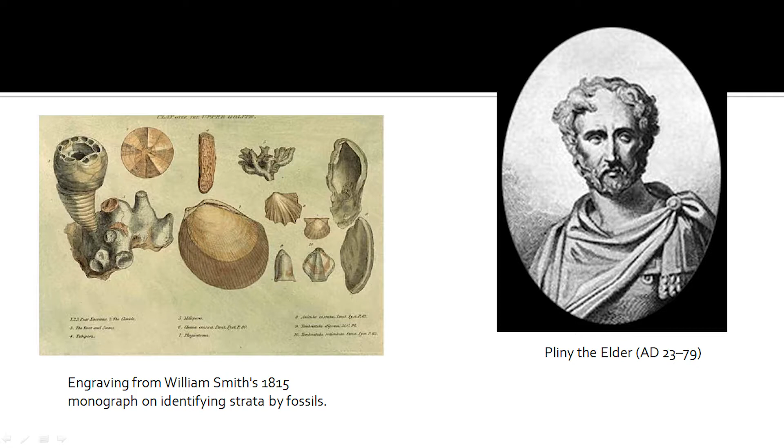Geology is a very old subject. We humans have used geological knowledge and geological material for our sustenance and survival. During the Iron Age, we were mining iron ore. During the Chalcolithic Age, we were mining copper. Throughout human history, we have retrieved material from Mother Earth. We have used geological knowledge of building stone and excavation. Ancient Greeks, mainly Aristotle, Theophrastus, Pliny the Elder, wrote scriptures about geological time, geological processes and geological material.

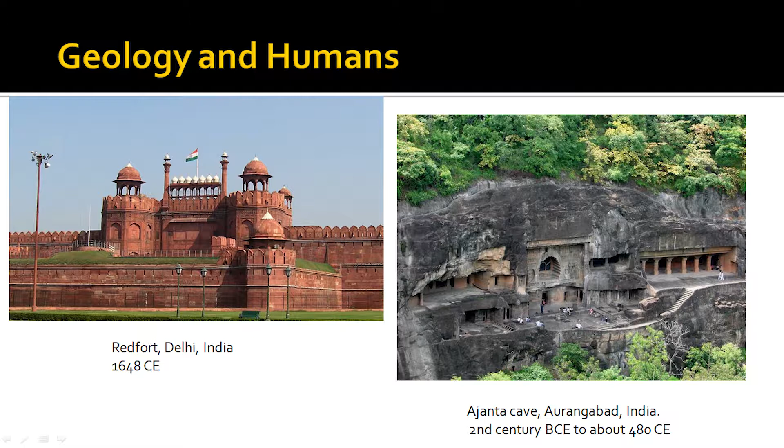So it won't be an overstatement if I say geology, or the use of geology, or the existence or prominence of geology, is as old as human history, human time. If not even Homo sapiens, I think even probably Neanderthals were using geological knowledge. Flint was being used to create tools during the Stone Age.

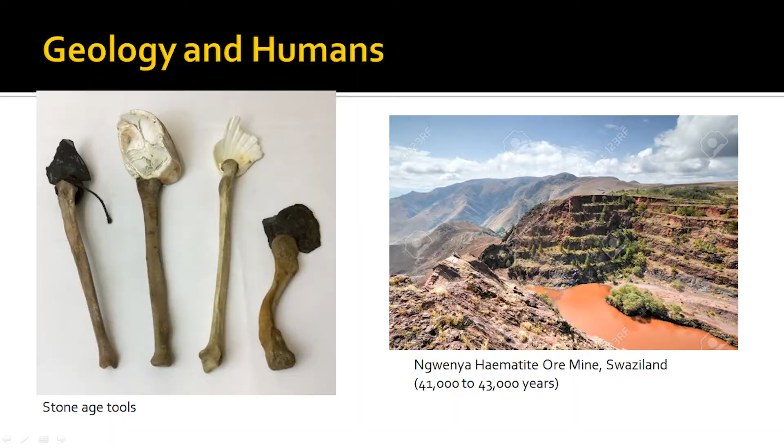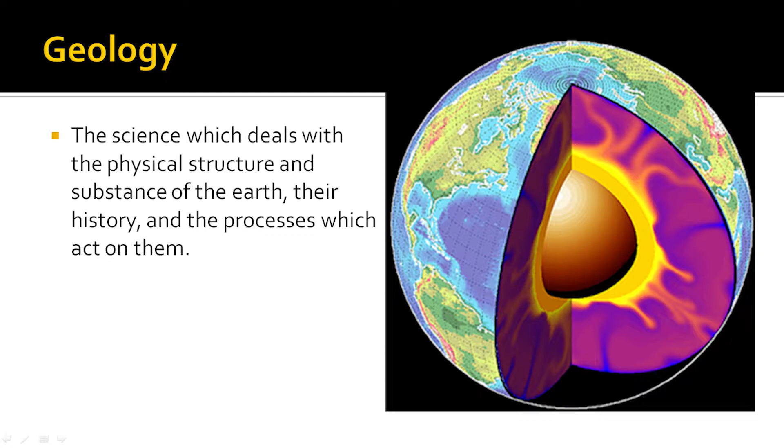So geology is old. And what is geology? Geology is the study related to Earth's interior, Earth's surface, structures present in Earth, the composition of Earth, and the various dynamic processes which are taking place on the surface and inside the Earth.

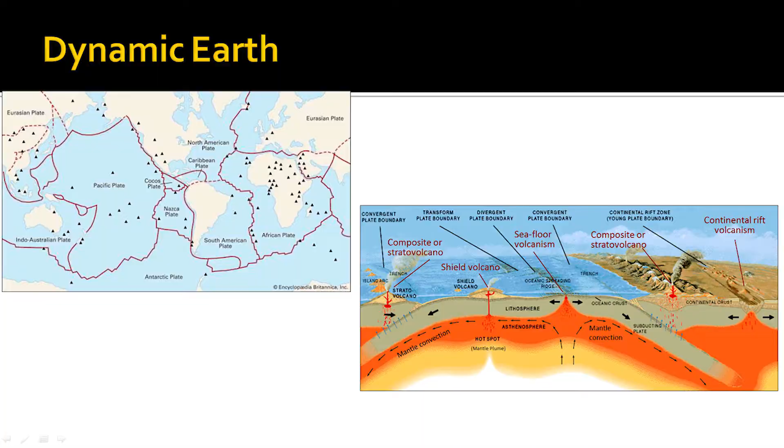Now, we know that geology is quite old, geology is ancient. However, there is a branch of geology which is relatively new. We call it engineering geology. Now, what is engineering geology? Engineering geology is the engineering application of geological knowledge.

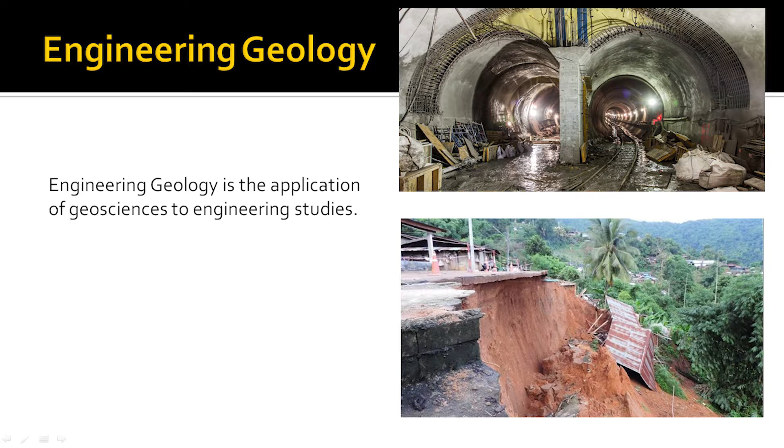So if you are constructing a dam or constructing a tunnel, all these constructions either take place on the Earth's surface or inside the Earth's surface. And they have to have geological inputs, be it the amount of stresses surrounding the construction or the parent material in which the construction will take place. So geology and the use of geological knowledge for civil construction is engineering geology. Again, this is a very new field, let's say 100, 150 years old. Prior to this, limited geological inputs were incorporated while designing a tunnel or a dam.

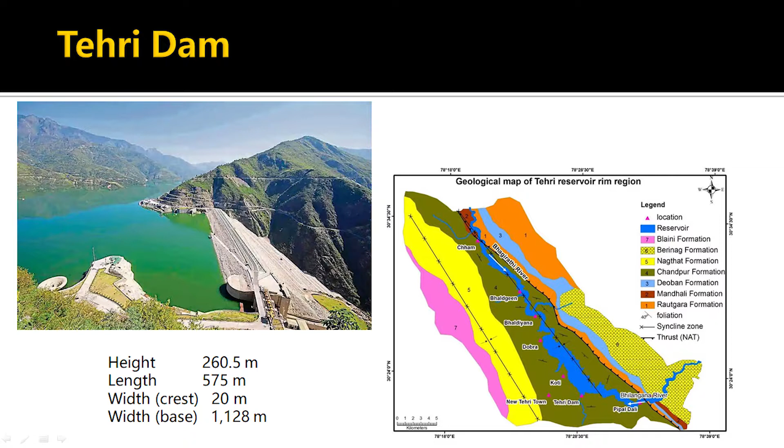However, things changed. During the early 20th century, while underground excavation was taking place in the Alps, there were instances of rock bursts and tunnel squeezing. Then the mining engineers and geologists realized that there's more to it than just the composition of the rock material. There are stresses, there are different stress environments which affect the rock mass.

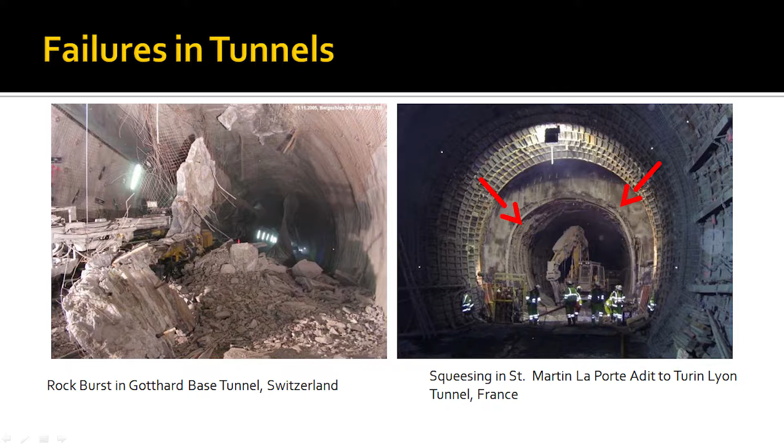Historically, it has been assumed that if it is rock, then construction would be much easier, because rock is always stronger than soil mass. Technically, if a consolidated material has a strength beyond 1 megapascal compressive strength, then it's classified as rock. So historically, it was always thought that construction in rock is easy, but things changed.

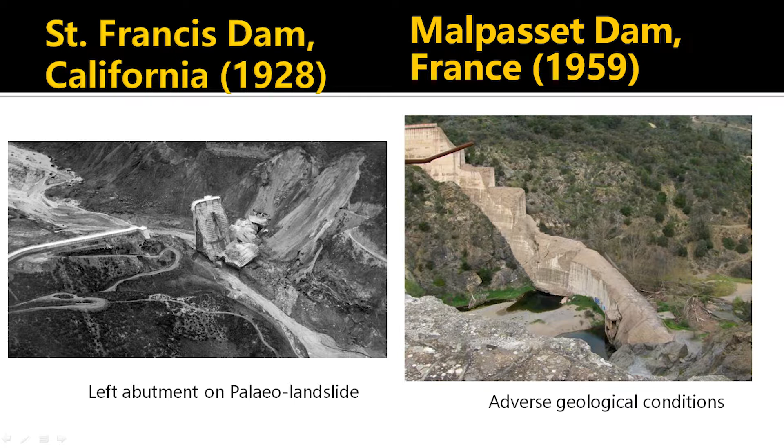The underground excavation in the Alps made tunnel engineers realize that there can be issues related to stress environment during excavation. Then another major thing happened in 1928, the collapse of St. Francis Dam in California. The dam was designed by Mulholland, who was a self-trained engineer.

Limited geological knowledge was available, and people were actually not keen or were less inclined towards employing geological knowledge. If it appeared like a rock, then it was thought that this will have greater strength. So the left abutment of St. Francis Dam was founded on a paleo landslide, and soon it collapsed, leading to the death of more than 400 people.

Then again in 1959 in France, the Malpasset Dam, a concrete arch dam, collapsed. The reason behind the collapse was the designers not employing the geological setup or the consequences of the prevalent geological setup. The gneissic strata, whose foliations were dipping downstream, combined with the heavy load resulting from impoundment of water, led to failure of the dam.

These instances made civil engineers and geotechnical engineers realize that we need to employ geological input, be it the mineral composition or the discontinuity orientation, while designing our dams, tunnels, roadways and highways.

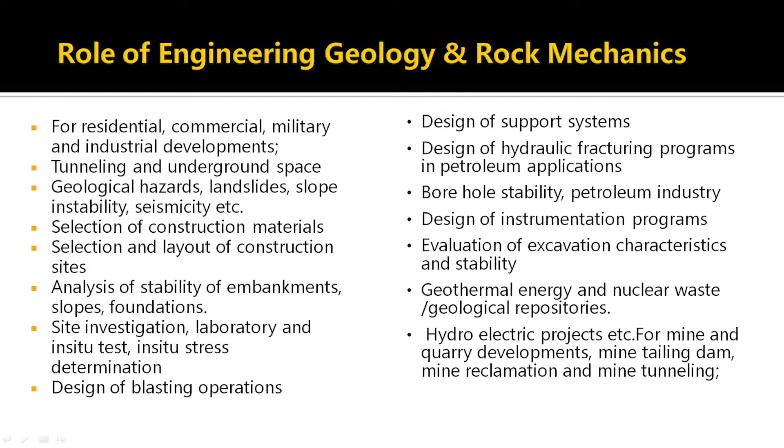Now, you can either be an engineering geologist or a geotechnical engineer. Geotechnical engineers and engineering geologists work along the same lines. The difference arises from the fact that an engineering geologist does engineering using a geological base. On the contrary, a civil engineer, a geotechnical engineer, does geology using a civil engineering base.

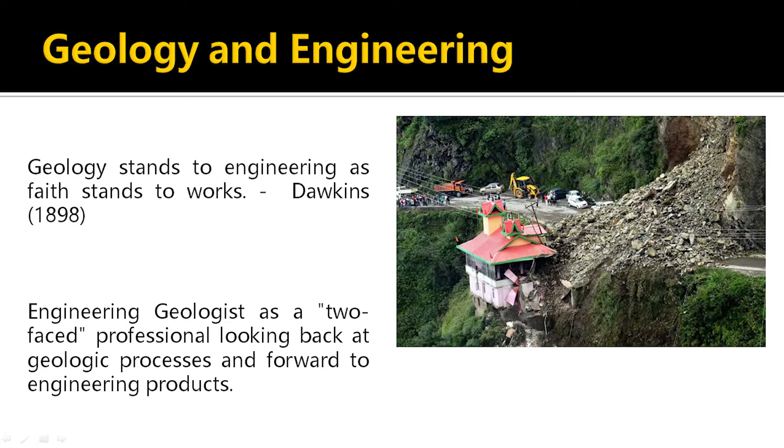Now, what we actually deal with, or what we want from this geological or geotechnical knowledge, is to know: if I construct a building, a dam or a tunnel in a certain rock mass, will it remain stable? What would it require to remain stable? What are the challenges I'll face while undertaking excavation?

Now, what I want from my ground is for it to give me easy excavation while I'm excavating, but after the completion of the excavation, after the completion of the structure, I want my rock mass, my ground, to remain stable.

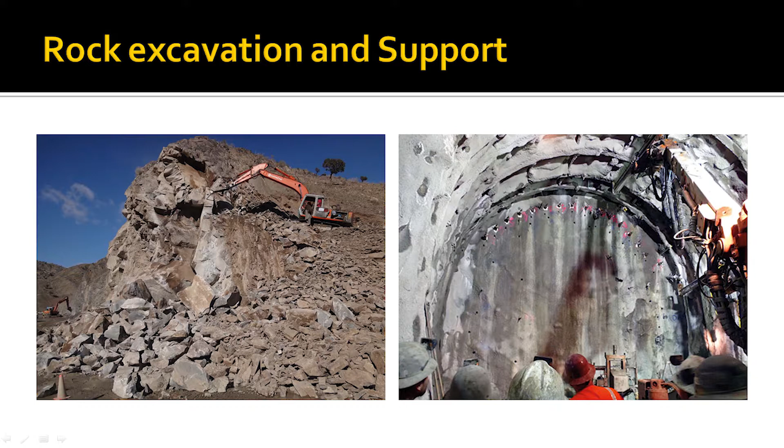My requirements from the ground are twofold. I want it to be weak when I'm excavating, and I want it to be self-supportive, or stable after the work has been completed.

All these factors come down to the strength assessment. What is the mineralogical makeup of my material? In engineering geology, we mostly deal with rock mass and rock material. Rocks are an aggregate of minerals. They have certain strengths, certain composition. They may be prone to easy weathering, or they may hinder or delay weathering depending upon their composition.

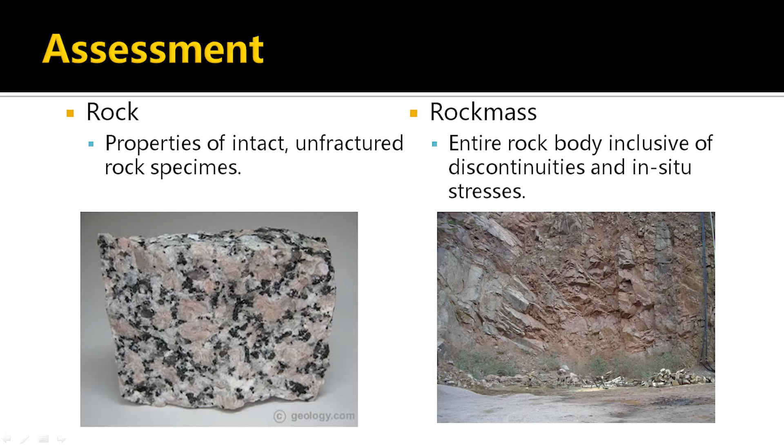But they are intact in nature. Rock material, the way I have used it till now, is intact rock mass. What engineering geologists have to study is rock mass, which is intact rock material, an aggregate of minerals, plus discontinuities. Discontinuities are joints, fractures, shear planes, faults, together with in situ stresses. So a rock mass would be your intact rock, your discontinuity planes, and your in situ stresses.

The combination of these three components compiles what you call a rock mass. So rock mass can be weak, highly deformable, or strong. We decide these three factors, its deformability and strength, based on tests done both in situ and inside the laboratory.

Another thing that requires consideration is scale effect. If my area of interest, my excavation domain or parameter, is quite small, then I only need to be concerned about the intact rock properties, the properties of the aggregate of minerals, the composite of different minerals. But if I increase my scale, then the properties of discontinuities, the joint system, are included, and they are crucial to decide the whole rock mass properties.

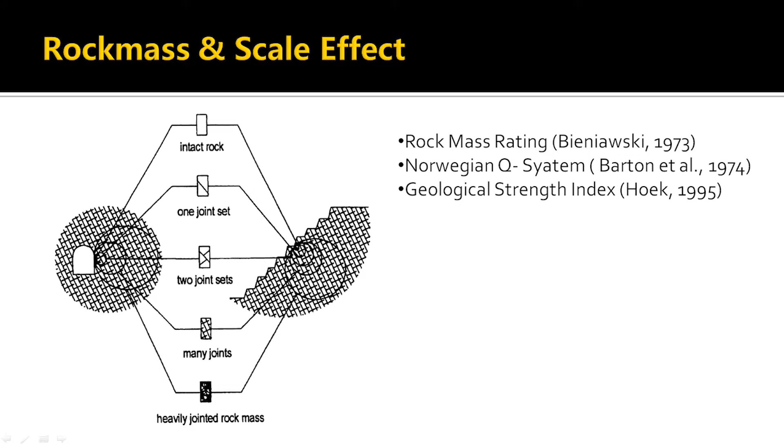There have been other well-defined classification schemes: given by Bieniawski, which is Rock Mass Rating; given by Barton, which is the Q system; and one given by Hoek, GSI, Geological Strength Index. We will cover these topics in another lecture, but for now we'll primarily focus on intact rock properties.

The assessment of both rock and rock mass properties is crucial for design of any excavation and construction. Before we go to the strength assessment, we first need to comprehend the difference between pressure and stress. So what is pressure, what is stress, and how is pressure different from stress?

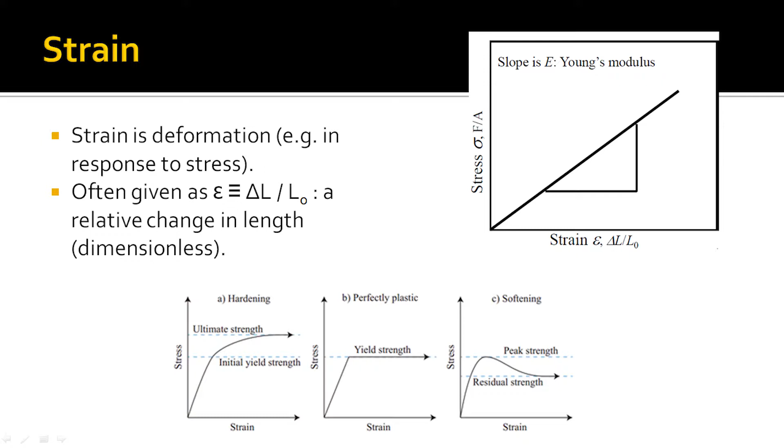Pressure is force per unit area. Similarly, stress is also force per unit area. But there is a fundamental difference between pressure and stress. Pressure is an external entity, while stress is internal. There is generation of stresses due to externally applied pressure. Once you exert some external pressure, some external load on a rock material, there is a restoring environment generated inside the rock material, which is called stress.

Again, pressure is scalar. On the contrary, stress is a second order tensor. It has 9 different components. For pressure, you will have similar values in all directions from a point, which may or may not be true for stress. Another important thing is pressure is always acting perpendicular to a surface and is always compressive. On the contrary, stress can be compressive, tensile, or shear.

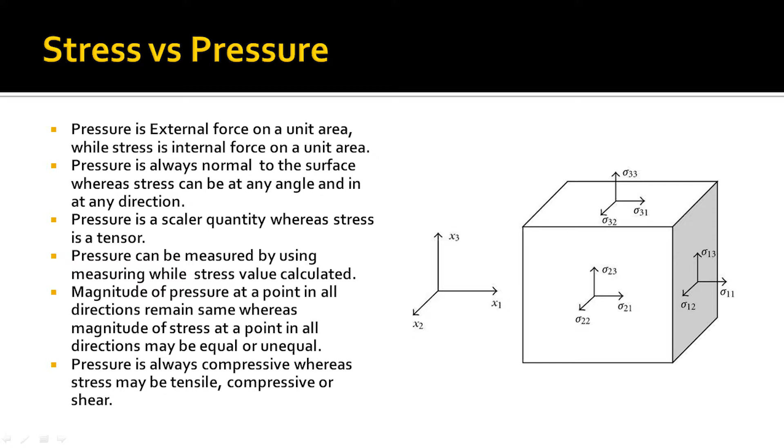Based on Cauchy's theorem, stress in a body at any point can be resolved into 3 mutually perpendicular stresses named sigma 1, sigma 2, sigma 3. Sigma 1 being the maximum, sigma 3 being the minimum. These axes are mutually perpendicular to each other, and the combination of these stresses generates normal and shear stress inside any plane in an element, in an object.

Pressure leads to stress. This is external, while this is internal. Suppose there is a block of rock, and I apply some force, some load. Then there will be certain restoring forces generated inside this body. Now this is stress here. You are applying force here. This force is generating a certain amount of stress. So stress is internal. Now how come it's different from pressure?

Numerically, both are force divided by area. In rock engineering geology, it's megapascal, Pascal being Newton per meter squared. So numerically, they are both equal, but there is a fundamental difference between pressure and stress.

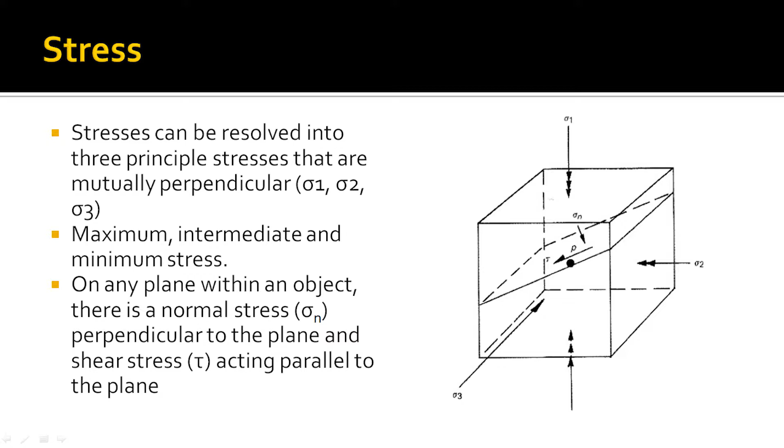So for each plane you will have one normal component and two shear components. If this is your y axis, this is your z axis, and this is your x axis, and you have a cubic element here, then on this plane you'll have a normal stress component denoted by sigma y and two shear components. One would be directed towards x, denoted tau yx, and another one tau yz. This is true for all the components.

So this is the difference between stress and pressure. Again, you have one maximum principal stress, one minimum, and one intermediate. These are the stresses which are acting on planes which have zero shear stress.

They can be tensile, compressive, or shear in nature. This stress leads to strain, which is deformation. Whenever there is stress acting in a rock material, there is development of strain, usually denoted in percentage as the ratio of change in either length or volume divided by original length or volume. So your strain can be axial, diametral, or volumetric strain.

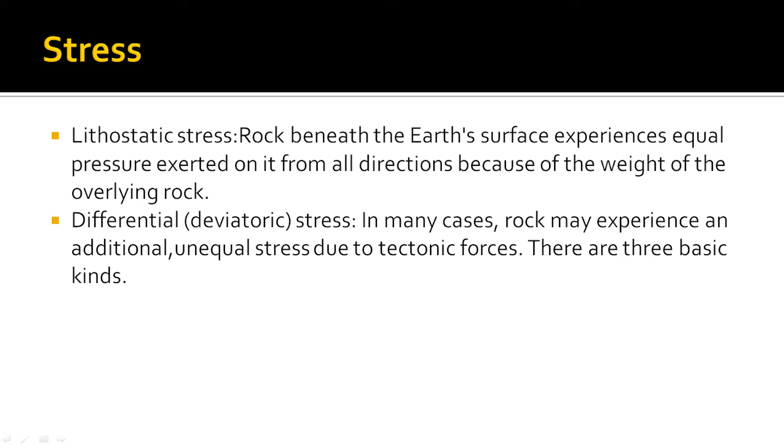During the tests conducted, there is a peculiar plot of applied stress and the resulting strain for each rock. The gradient of the stress-strain plot denotes the Young's modulus of the rock, which is the ratio of stress by strain. Numerically, it is the stress required by a rock for generation of unit strain.

Different rock materials produce different stress strain curves. Once you start loading a rock material, there is generation of stress and the amount gradually increases. The increased stress leads to increased strain, which keeps on increasing up until it reaches a yield value where the deformation, the strain, is non-recoverable. That is, if you remove the stress, the strain will persist.

Then if you further increase the amount of stress, there will be a peak reached. At that point, rupture takes place. After this, the curve can either go up or go down. If the peak goes further up, that is strain hardening behavior, meaning more stress is required for generation of strain after reaching the peak. If it goes down, that is strain softening, meaning after the peak, even if you remove the stresses, there will be subsequent deformations.

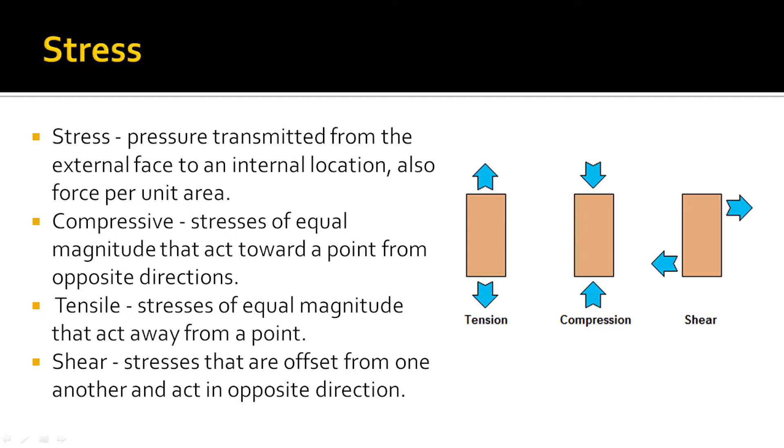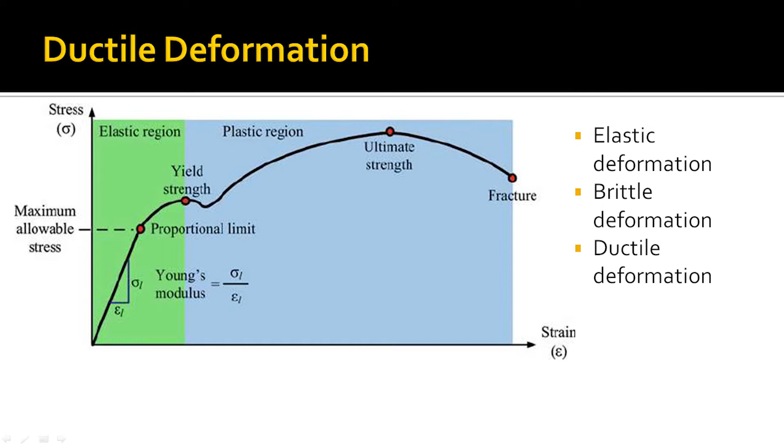Here in this graph, you can see the deformation of ductile material. Ductile deformation takes place at great depths beneath the Earth's surface, where the confinement is considerable. Once the yield is reached, there is plastic deformation, which is why we have folds present on the Earth's crust.

So based on the stress strain curve, you can either have elastic deformation, where the strain recovers when you remove the stresses, brittle deformation, where you'll have rupture once the peak strength is reached, or ductile deformation, which is deformation without any rupture after peak strength.

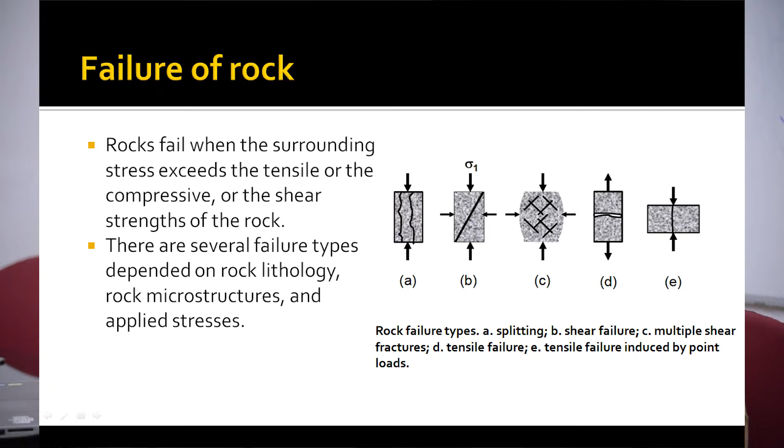Having understood the difference between stress and pressure, we now move to failure in rocks. Rocks fail when the surrounding stresses go beyond the strength of the material. So if the strength of a material is x, and the surrounding stresses are x plus 1, then the rock will fail. This is a very generalized and simplistic statement.

The mode of failure may be under compression, under tension, or under shear. Depending upon the compressive strength, tensile strength, or shear strength of the material, you will have different failure modes and different failure strengths. Compressive strength is not the same as tensile strength, which is not the same as shear strength. Different stresses generate different failures.

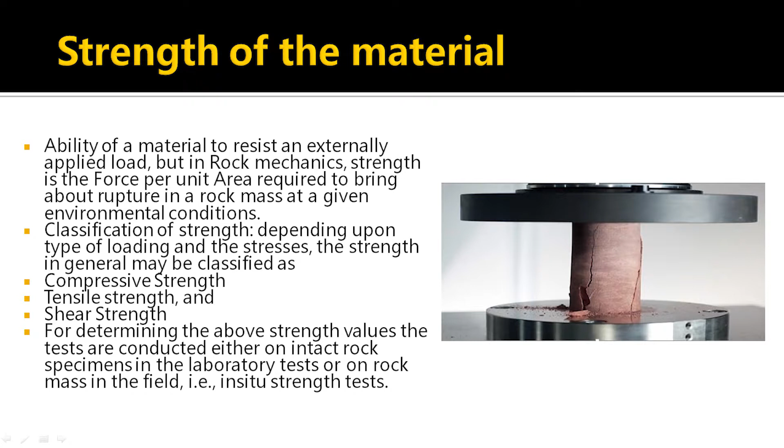So moving on to the strength of the material, we'll primarily focus on uniaxial compressive strength. This lecture will mostly deal with laboratory tests; we are not going to focus on in situ tests. First thing is uniaxial compressive strength, or unconfined compressive strength.

All tests in engineering geology and rock mechanics are supposed to follow codes. These codes, the testing procedures, are given by ISRM, the International Society for Rock Mechanics. There is the Indian code, BIS code, and codes by ASTM, the American Society for Testing of Materials. You may ask why we need these standard procedures. The reason is that if tests at different locations and on different materials are conducted using the same code, it's easier to correlate the properties, because we know we have followed the same procedure, the same codes. That is why we follow codes.

Here we will mostly be following ISRM and Bureau of Indian Standard codes. The interesting part about ISRM is that it was formed in the year 1962, by German Professor Leopold Müller. After the failure of Malpasset Dam in France in 1959, it was recognized that rock tests and their classification procedures needed to be standardized. So ISRM is the governing body as far as rock testing and rock classification schemes are concerned.

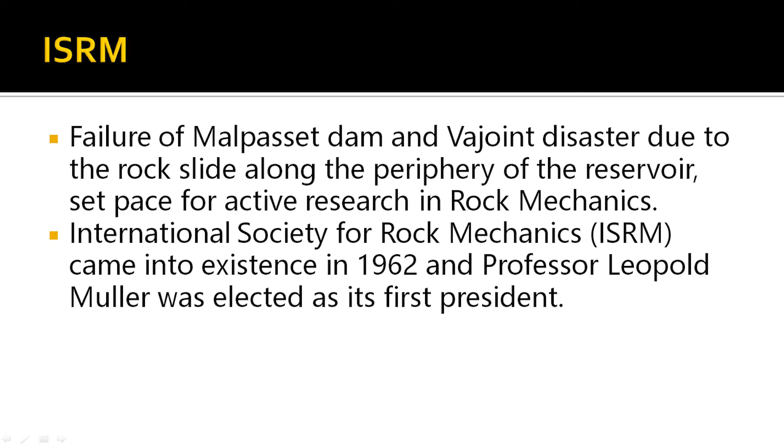So UCS stands for uniaxial compressive strength, or unconfined compressive strength. These tests are conducted on rock cylindrical cores.

The cylindrical cores are usually retrieved from rotary drilling using diamond bits. Most of the projects where excavation will take place undertake borehole drilling to retrieve or recover subsurface information through rock cores. The rock cores come in different sizes, ranging from AQ, which has a diameter of 27 millimeters, going up to NX, which is 54 millimeters.

As per the prescribed code, the UCS test should be done on samples not less than 35 millimeters in diameter. In usual practice, NX size samples are the most common ones, and tests are conducted on them.

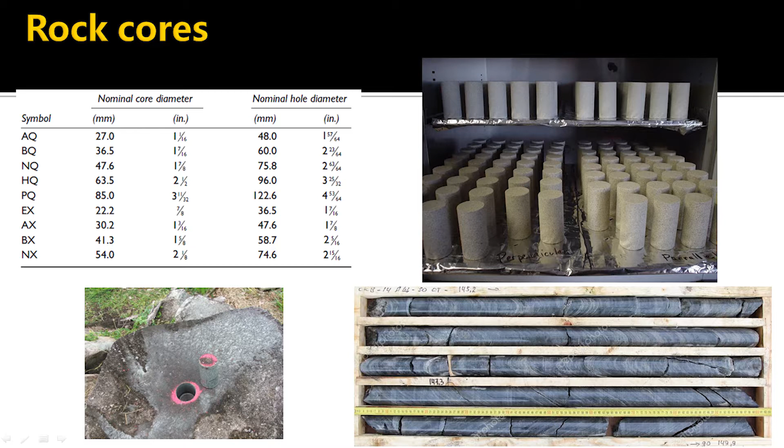Coming to the codes for UCS tests, the symbols used for denoting UCS tests are QU, sigma U, sigma C, and the ASTM code for UCS test is ASTM 4543. The Indian code is IS 9143-1979, and the standard procedure is given in ISRM 1981.

To sum it up, UCS test is axial loading of a cylindrical core specimen when the core specimen is unconfined from the sides.

The UCS strength, or uniaxial compressive strength, of the rock material is calculated as the applied load divided by area, which is pi r squared, r being the radius of the rock core.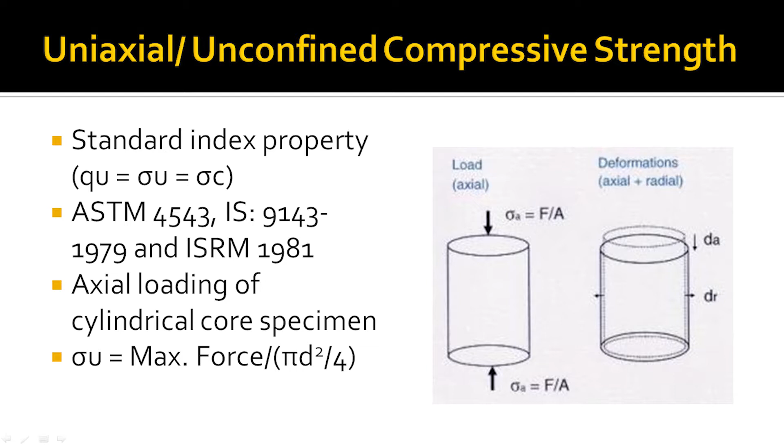The apparatus required for testing the uniaxial compressive strength of the rock material requires a suitable loading machine which can load a sample at the rate of 0.5 to 1 MPa (megapascal) per second. The discs used for loading should have a hardness not less than 30 Rockwell hardness, and the thickness of those discs should not be less than 15 millimeters.

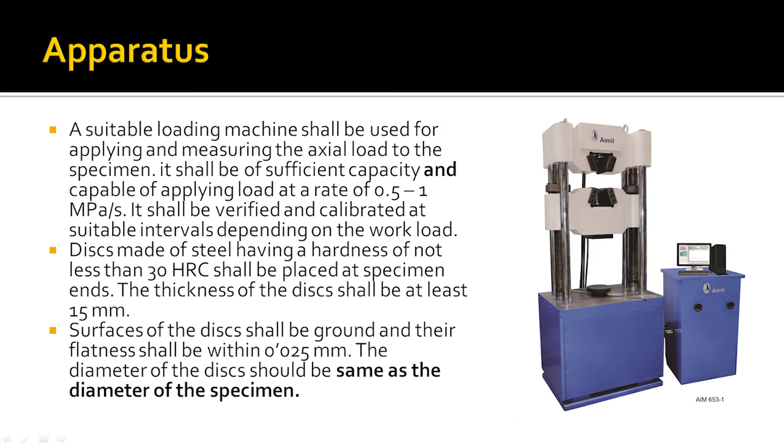One important thing is that the ends should be really plane, and the height to diameter ratio of the sample should be between 2.5 to 3. So if the diameter of your sample is 1 centimeter, its height should be 2.5 to 3 centimeters. This is crucial and forms the norm for testing.

The specimen diameter should be at least 10 times the size of the largest grain in the rock. This should also be kept in mind while testing a rock material. And again, the ends of the sample should be flat to within 0.02 millimeter, and should not depart from perpendicularity to the axis of the specimen by more than 0.05 mm in 50 millimeters.

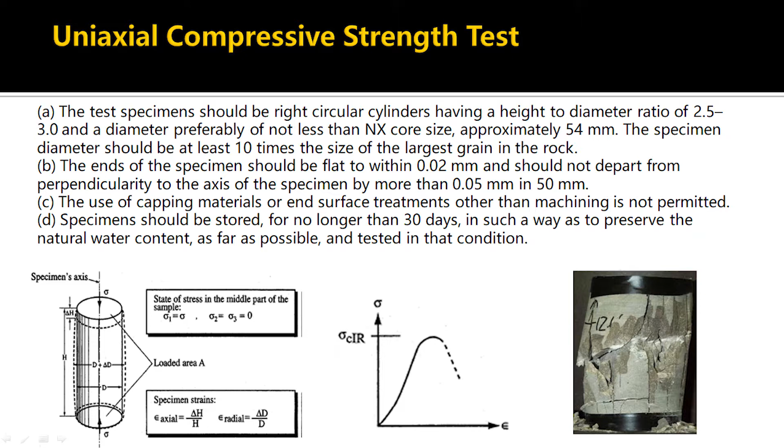Once the sample is loaded, there is generation of strain. The strain is axial, meaning there will be reduction in length of the material, a shortening in the length, and then you have radial strain, meaning there will be an increase in the diameter of the sample.

We use strain gauges to measure the strain generated axially and diametrically. Now, the strain measurements are used to compute the elastic modulus and the Poisson's ratio of the rock sample along with its UCS values.

As mentioned, axial strain would be change in length divided by the original length, and radial strain would be change in diameter divided by the original diameter.

In this picture you can see how the failure looks like, and in the middle image there is a plot between the applied stress, which is force per unit area, on the y-axis, and the strain, which is change in length divided by original length, on the x-axis.

Another thing that should be borne in mind is that while testing, the stress rate should be between 0.5 megapascals to 1 megapascal, and the specimen should be loaded at a constant rate such that failure takes place in about 5 to 15 minutes of loading.

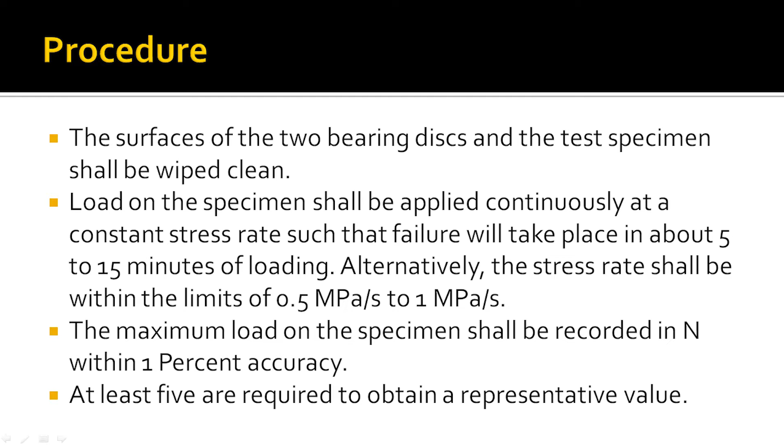The strain gauges, one tied axially, another tied diametrically, give you the strain values. These strain gauges work on the principle of impedance, resistance. So when there is change in length, the resistivity changes, which signifies the strain generated.

So you'll have an axial strain which would be much larger than the corresponding radial strain, as you can see in the image. Here the Poisson's ratio would be lateral or radial strain divided by axial strain, and your Young's modulus would be the stress applied, or the gradient of the stress-strain curve for axial tests.

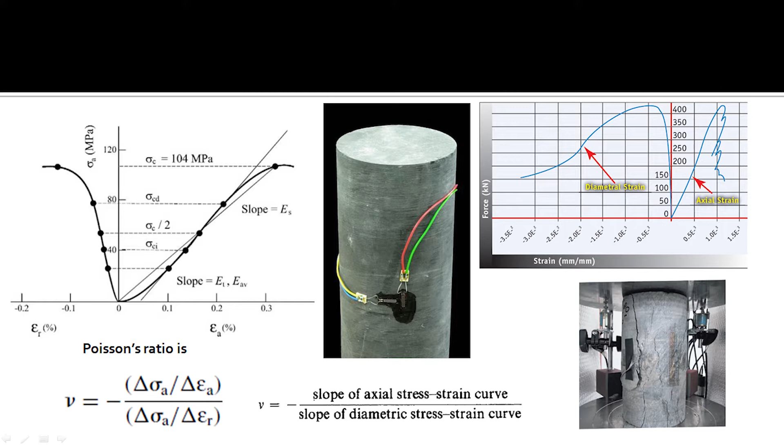This is the gradient of the curve between axial strain and applied stress. Young's modulus can be tangent modulus, secant modulus, or average modulus. Tangent modulus is the gradient of the middle 50% of the stress-strain curve. Average modulus is the modulus of the whole stress-strain curve, while secant modulus is the gradient between the origin of the curve and 50% length of the curve.

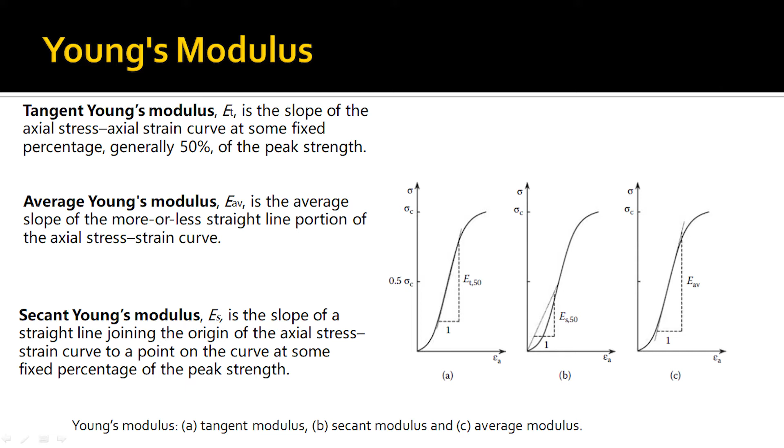So these are the three representations of the Young's modulus, and one should be careful, or one should be explicit in defining what sort of Young's modulus it is. Is it tangent modulus, is it secant modulus, or is it average modulus?

UCS value is a function of the grain size, the rock type, and how many microfractures or cementation is present. So rocks which are fine grained, rocks which are well crystallized, that is igneous or metamorphic rocks, they usually have a higher compressive strength as against fissile sedimentary rocks.

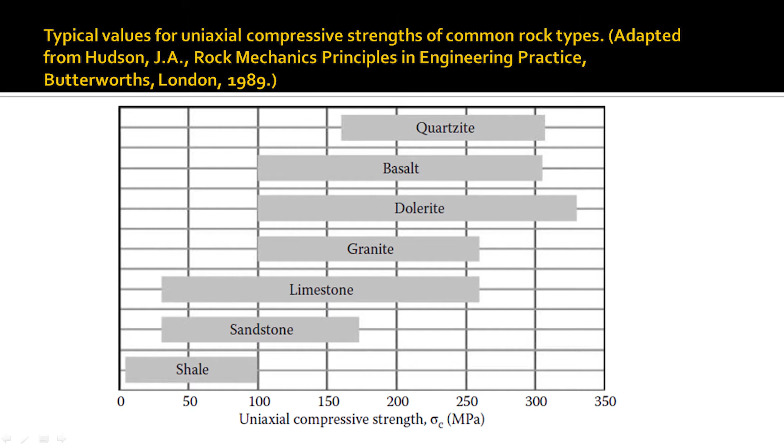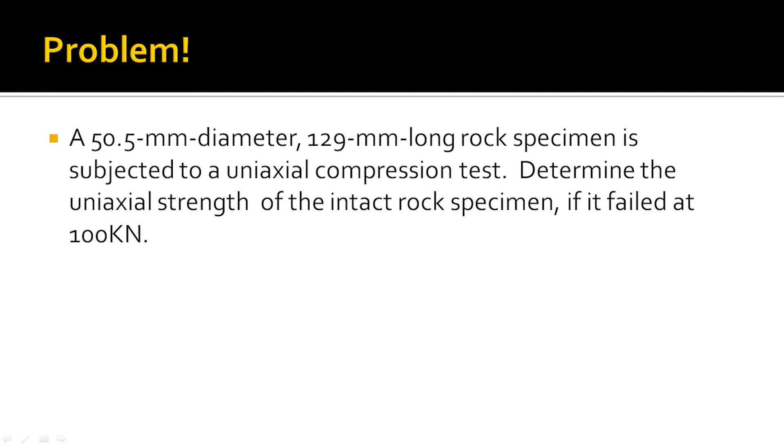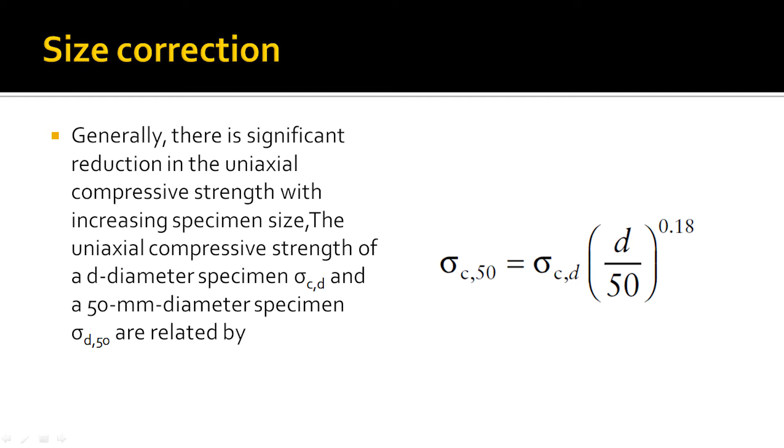Now it may happen that the core sample that you have may vary in its diameter. Usually all the tests as prescribed by ISRM are standardized for 50 millimeter cores. Then there is this correlation which helps you normalize your strength for core samples of 50 millimeter diameter.

So we'll see a live demonstration of the UCS test now.

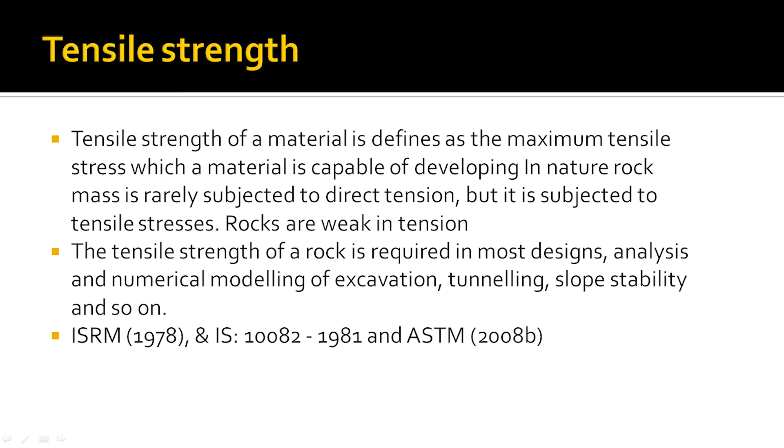There is a requirement for tensile strength in most of the excavations. It is used as an input parameter together with UCS in rock mass classification and Q system. So there are various avenues where tensile strength of the material is employed.

Now the actual problem for doing the direct tensile strength - the test for UCS that we did was direct in nature, you were directly loading a sample under compression. However, conducting direct tensile strength tests on rock samples is difficult. You have a difficulty in gripping the specimen and then applying the axial load without any eccentricity, it's a problem.

So instead of conducting direct tensile tests, we conduct indirect tensile tests, using a cage called Brazilian cage. It's called a Brazilian cage because it was designed in Brazil.

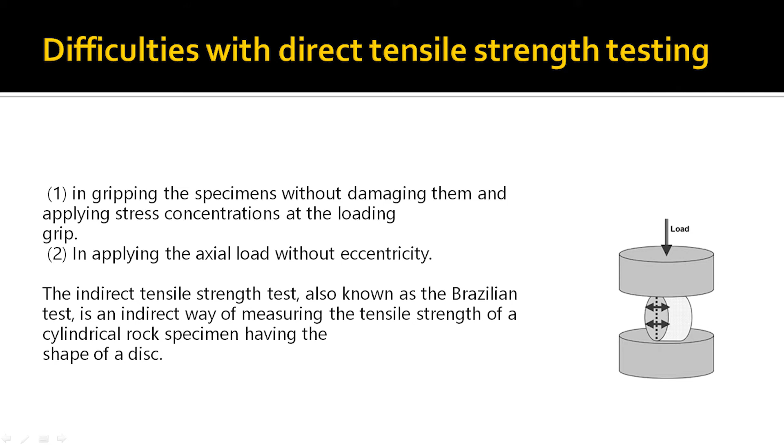For the Brazilian testing of rock material, usually NX size core samples which are 54 millimeter in diameter are preferred. The thickness of the NX size core sample should be half of the diameter, that is around 27 millimeter.

However, ASTM allows a thickness by diameter ratio of 0.20 to 0.75, and the two steel jaws will be in contact with the specimen over an arc length that subtends 10 degrees at the center when failure occurs. The two steel jaws of the Brazilian cage, right?

Another thing that is crucial here is the rate of loading. If you have a higher, swifter rate of loading, the load taken by the sample would be higher as against a slower loading rate. Here in this image you can see the specimen, the cage, both upper jaw and the lower jaw.

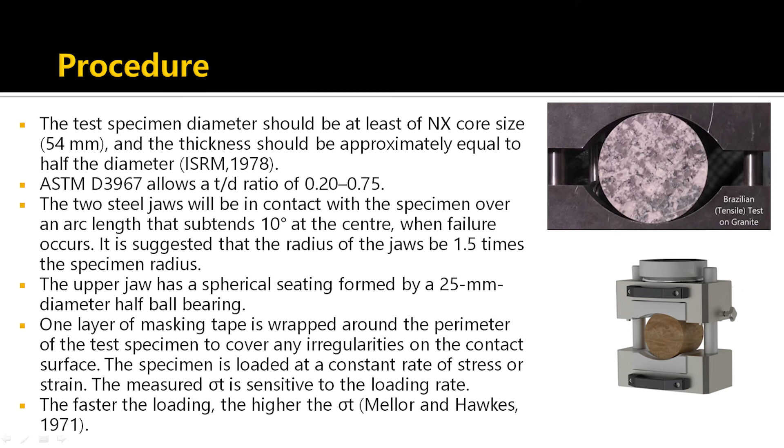So you have a half ball bearing on the upper end on which the load is applied, right? And the load at which the failure takes place gives the tensile strength, or sigma T, which is equal to 2P by pi DT. Here P is the load at failure, D is the diameter of the sample, T is the thickness of the disc.

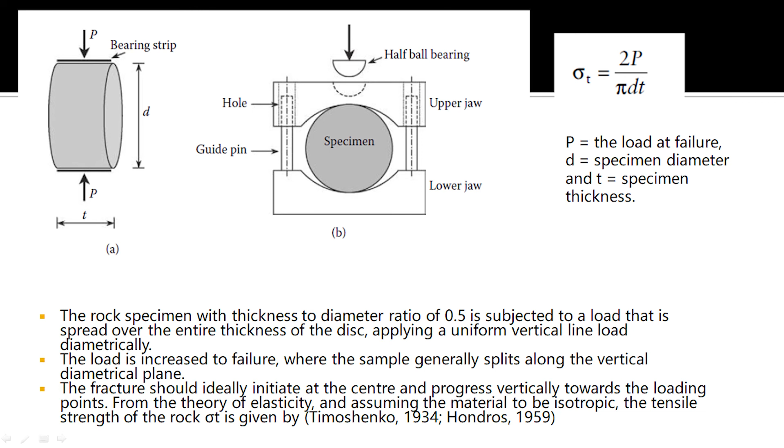Ideally, for an accepted Brazilian tensile strength test, the fracture plane should be parallel to the direction of the applied stress, and there should not be any indentation in the sample. So here the image to your left is a desirable mode of failure, and the image to your right shows a certain amount of indentation before failure. So this mode of failure is undesirable for Brazilian tests.

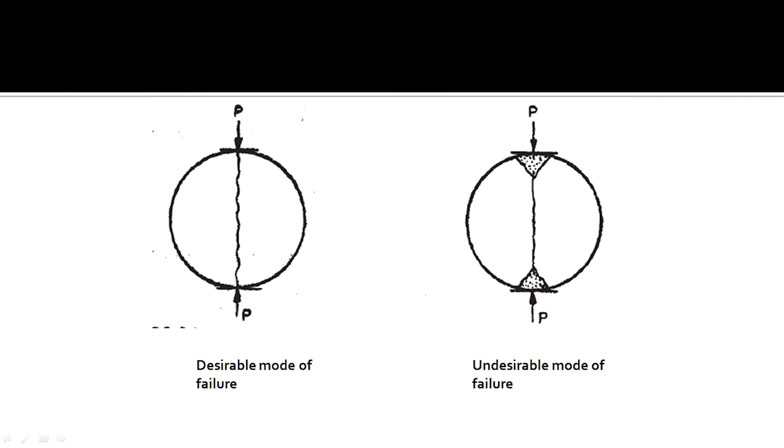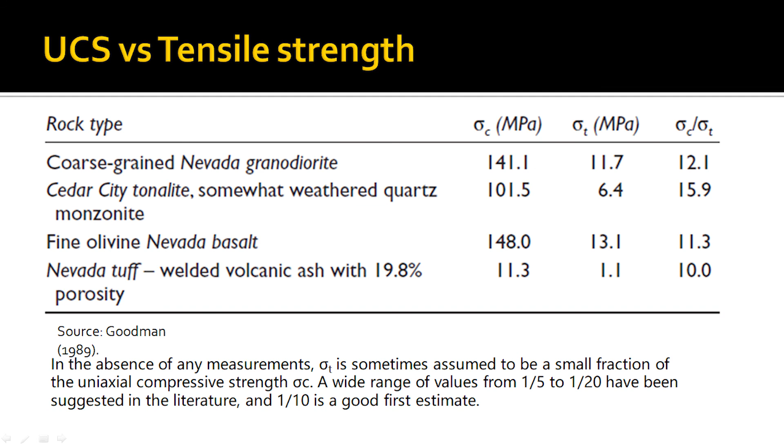So you can expect that the disparity between UCS and tensile strength can go as much as 10 times to 15 times. But a good estimate that is generally used during the preliminary stage of design is 1/10, or between 1/8 and 1/12. So if you have a UCS of 10 MPa, you can safely assume that the tensile strength should be around 1 MPa.